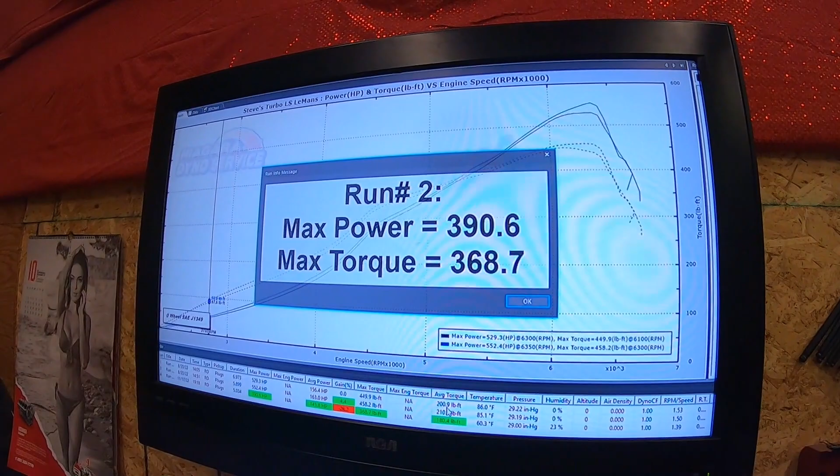What they call a 7-pound spring, with a cheap wastegate - that's not bad. Making 8 pounds, so let's call that full boost. We'll call 8 pounds full boost at about 5,500 RPM. And we started building boost, so we made 390 on that pull on 8 pounds of boost.

Not bad, but then we hit a snag. We went to go make a second pull, and we were going to command 4 pounds on the dome and see if that translates to 12 pounds, and the battery died. I know the batteries in this car are old - they're about 10 years old, and kind of on borrowed time. I have killed them already once or twice this year.

After putting a charger on it, the ECU was blank - we lost everything. We had no fuel pump, nothing. We don't know what happened. So we've had the charger on it for a while now. We've got it going again. We don't know what we touched, but the fuel pump's working again. Unfortunately, we lost a lot of the work we put into it, so we don't know what this next pull is going to do.

We're still going to try and command 4 pounds, but we don't know what it's going to do. We thought this was going to be a quick, easy night, and it's turning into a much longer night. But we're up and going again, so that's a good sign, and we will be making a pull shortly.

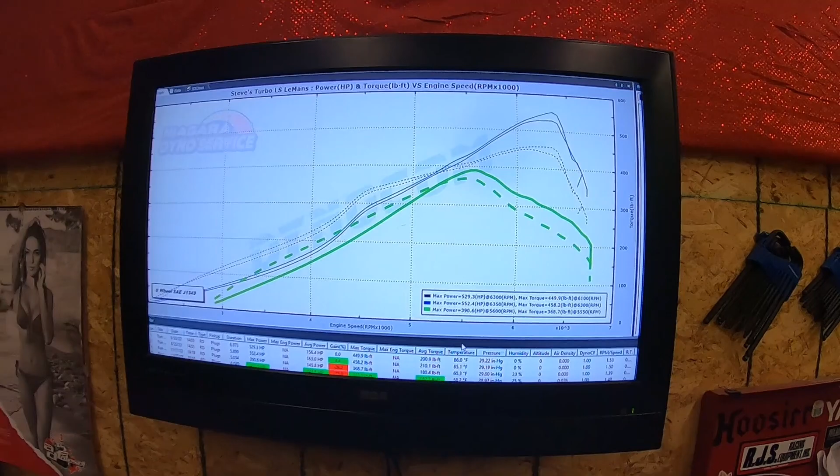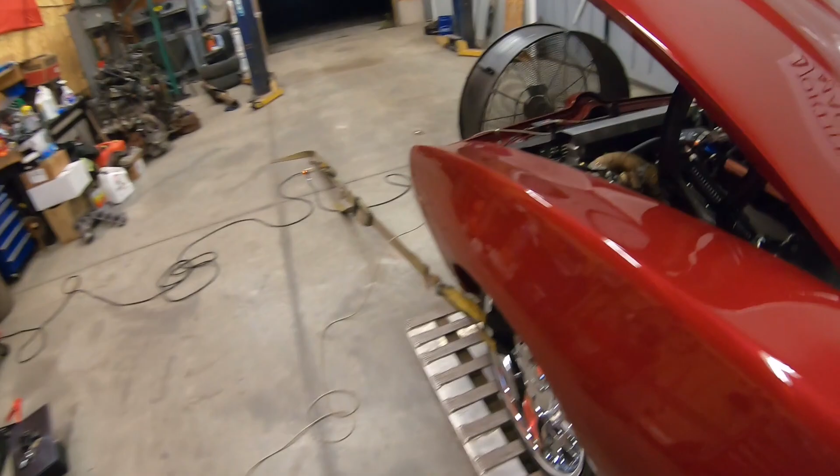I'd like to see if that went lean - the header was glowing. I saw that go red. Well, air fuel looked good when we were into it. Yeah, okay, no, just because there's a gap in the heat wrap. And it was like pink. So let's see what happened with boost.

Okay, so we had no cycling, no nothing, and we still just made 8 PSI.

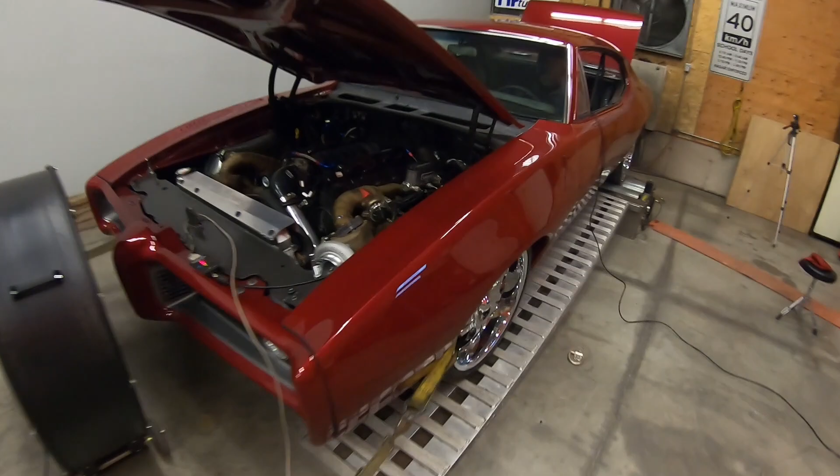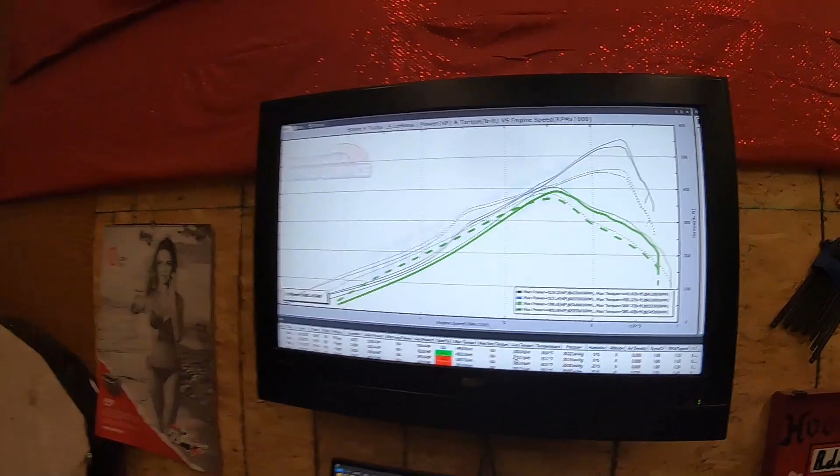The left side's glowing, okay. Let it idle down for 30 seconds.

So we've been messing around with the boost controller, trying to get it to work right. We still can't get it to work right, so we're trying different things. We think we might have it now. We've done a couple pulls, and it's still just 8 pounds, but we've made 440 horse on 8 pounds.

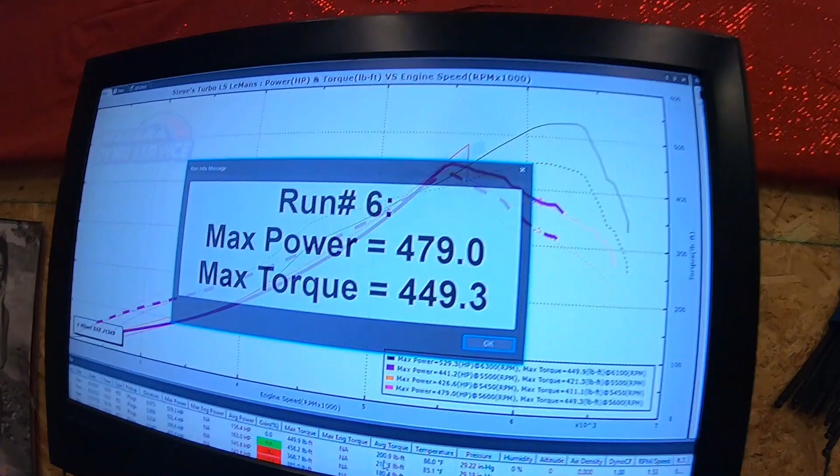Try it again. I saw a peak at 12 psi. 12? That's working, that's good, okay.

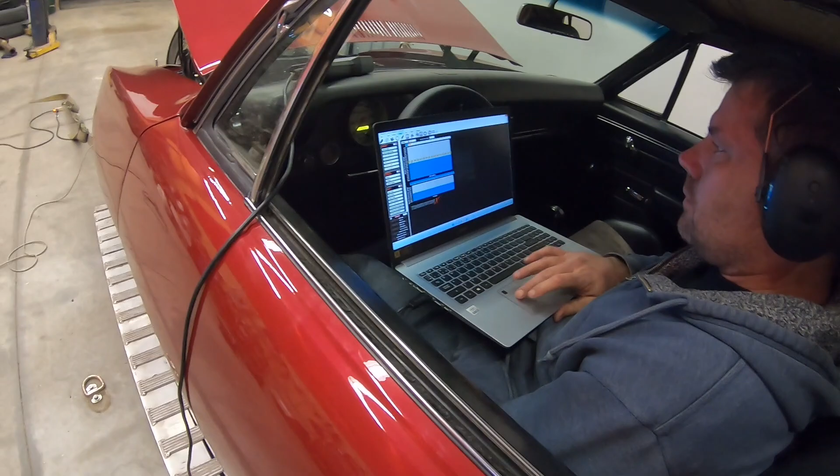Definitely sounded different. Yeah, it needs more load now because it's making more boost. So, you commanded 5, you got 4. 12.7 - almost. Oh, so almost 5. Yeah.

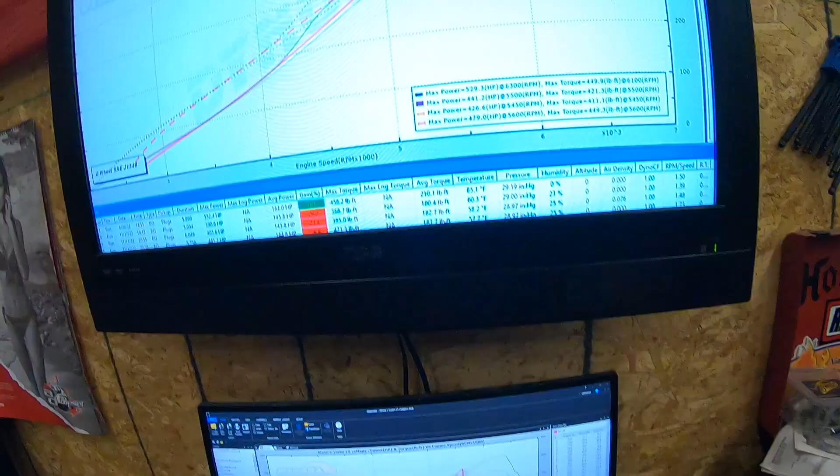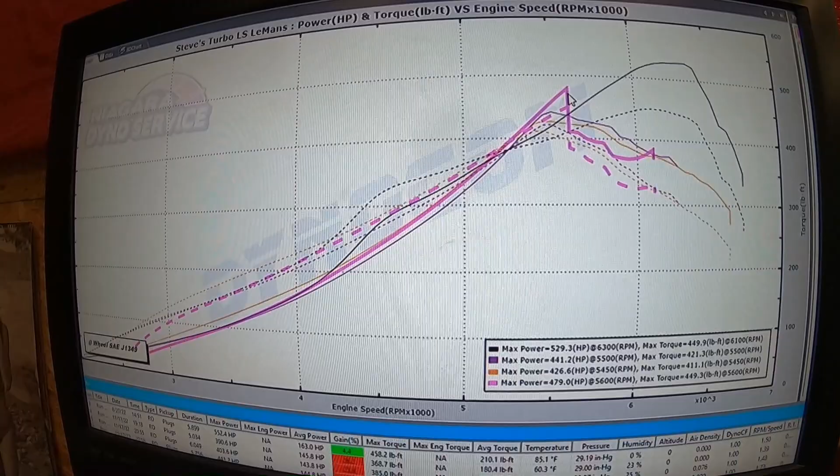See, something happened on that run. So now we gotta figure out what happened. Like it was climbing, and then some kind of a safety or something might have kicked in. We'll figure it out.

Okay, we should see 16 pounds with this one. Turning it up.

So we're having an issue right now with - we're pretty sure we're blowing the spark out. So we're gonna do a run right now on only 10 pounds on the dome. We're gonna drop the boost back down and we'll see if it cleans up a bit.

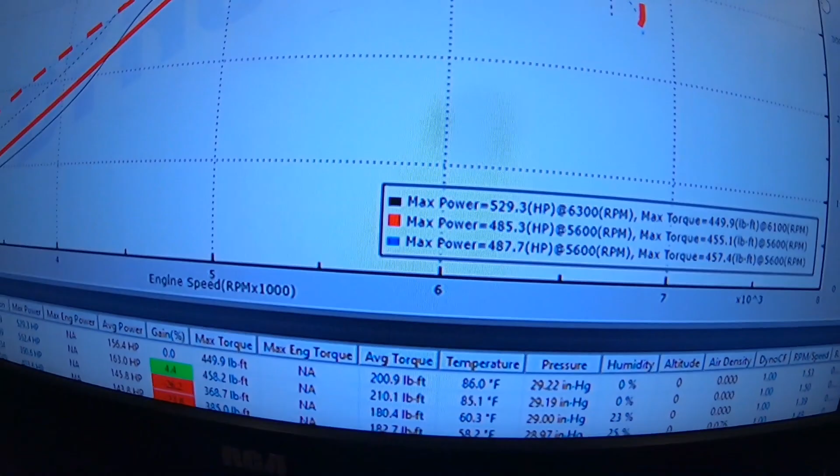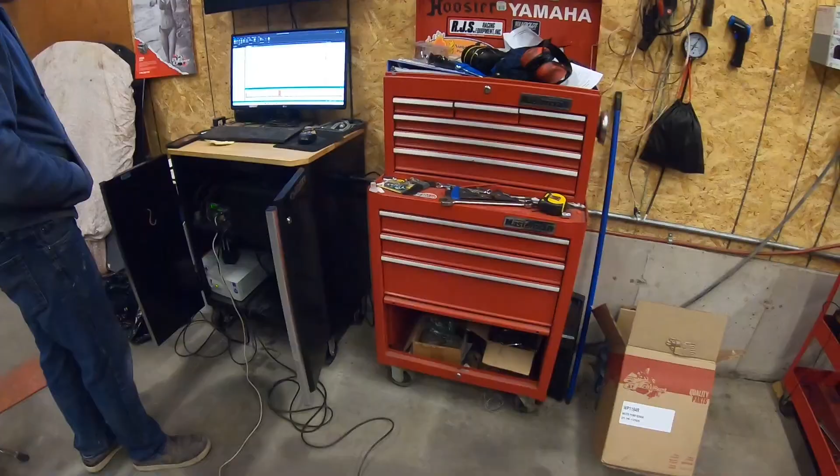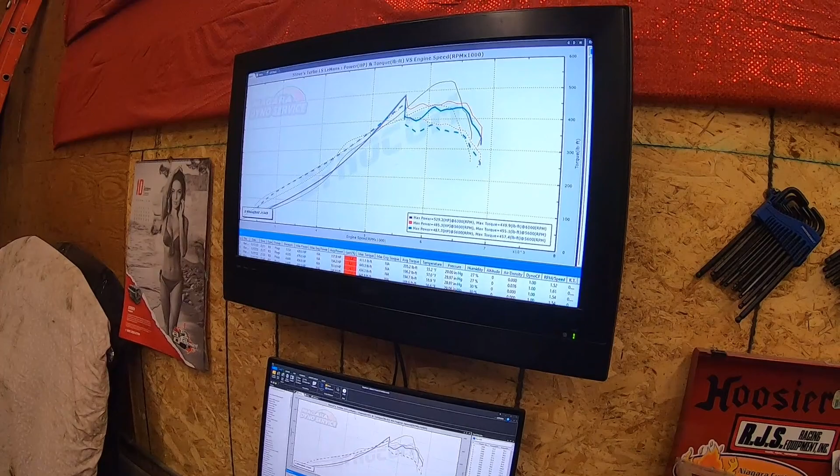Still breaking up, but we lost our belt. Every run's doing the same thing and we can hear it - you can hear it breaking up at 5,500 RPM and power is dropping off. But right before 5,500 RPM, you're trending with way more power, especially if we look at it per wheel speed.

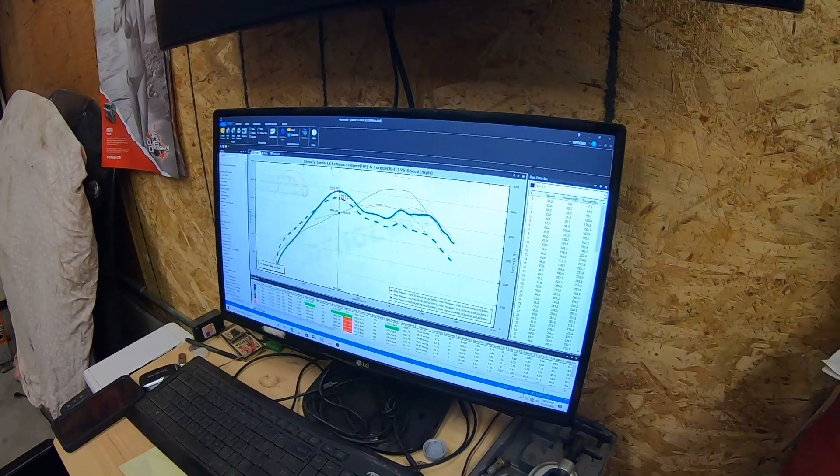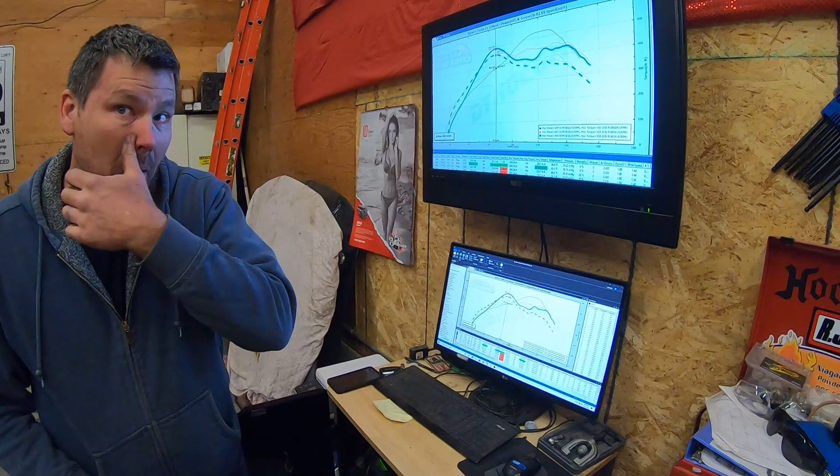So at wheel speed, right here at 80 miles an hour - well, let's look where it's peaked now, we're at 83 miles an hour - you're up over 100 horsepower. And then we're having the spark breaking up. But you're definitely in way more power here than you were with your last combination. Yeah, and whether that's the turbos or the cam or a combination of both - absolutely, yeah.

And it's nice knowing that the boost controller is working the way it should. It took a while to get there, but it's working exactly the way it should. When we command what we want, we're getting it. So yeah, we wanted 10 pounds on the dome, we got it, and it's doing exactly what we want it to. And we know the gate's making 8 pounds.

But I think that's it for tonight - our belt decided to come apart.

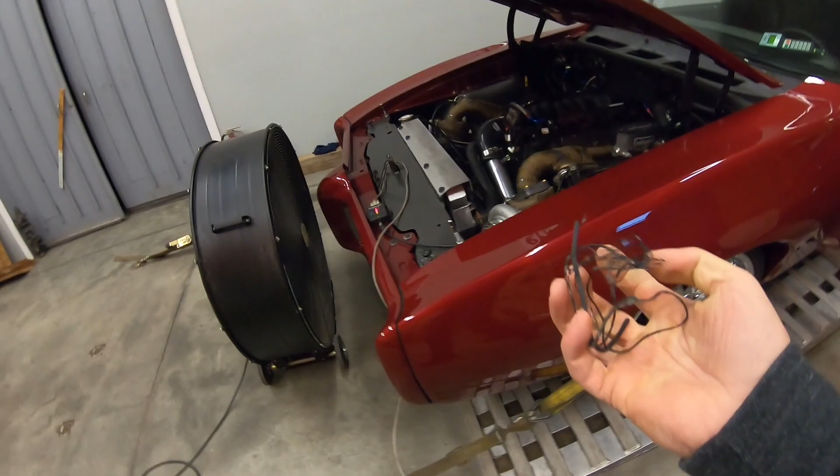It's part of it. We lost one rib, but I don't want any more to come off and hit anything, rip wiring out, go in the turbo, whatever.

So we have an issue right now with spark blowing out, and whether the gap on the plug is just too much is something to figure out another day.

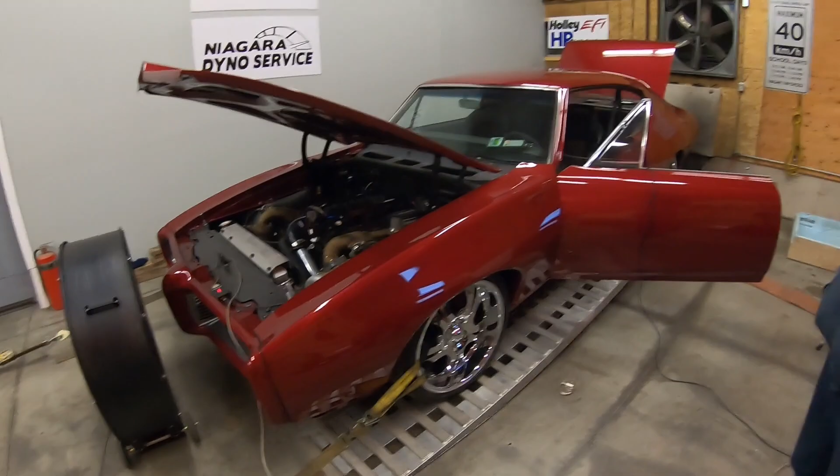It's getting late, I want to go to bed. I'm sure you want to go to bed too. Eventually, yeah, go home and see the wife. But that's it for today anyway.

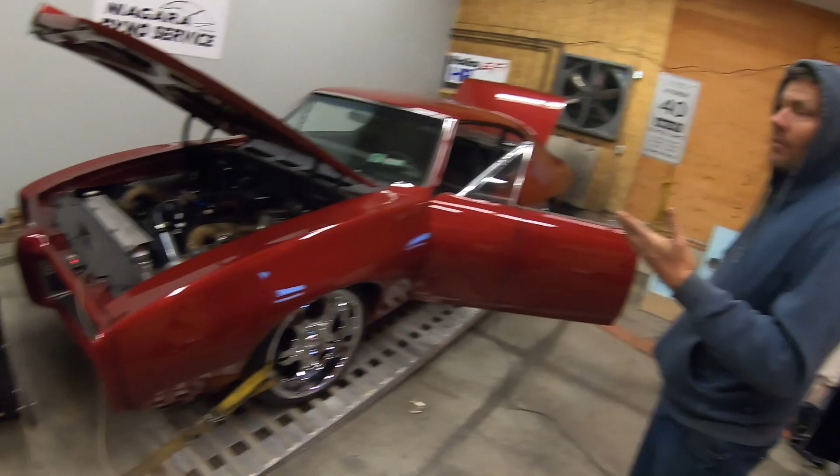Between you and I, I don't know what kind of coils you have. They're stock coils, from like an LS1 vintage, from a 2000 Camaro.

So you might not be getting all the voltage out of that you need. They're a little bit further away, so it's traveling over more wire, and the wire needs to be really good. I think you've got those three things - might not be getting you the spark energy that you need to jump that gap, or the condition of the plugs.

Just check them out. Yeah, that'll be this winter's project, is a little bit of spark maintenance.

But seriously, dude, the tune that came here, that you brought with you, was a very good tune. So it's good. Your only concern right now is making that spark jump the gap.

All right, so it's the next day. We're back at the shop, and last night's dyno session didn't quite go like I was hoping it to go.

We did make good progress on some of the things we wanted to work out, like the boost controller. We had to figure out some settings and parameters at the beginning, but we got the boost controller working, and it works very, very well.

The problem we were running into near the end of our session was when we were turning up the boost, we started breaking up high. It got to the point where the only way we're gonna fix this is if we pull the plugs out, close up the gaps, and try that.